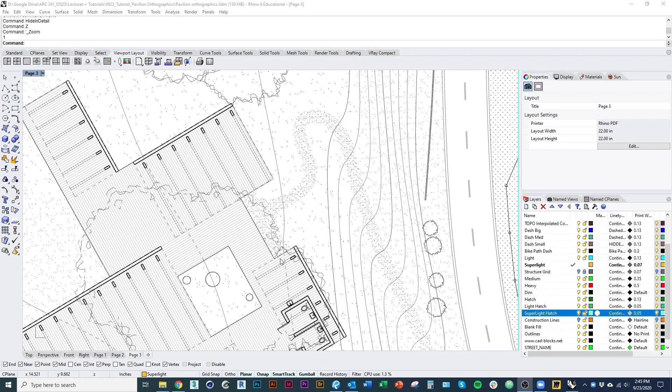Okay, so this is part 4 of the Pavilion orthographic drawing tutorials. As I mentioned last time, I was going to add some detail to this plan. And so here it is at kind of one full scale, which probably only makes sense for my computer screen. But anyway, you get a sense of how line weights are reading and how detail is reading.

Especially when you zoom to 1:1, some things will show up a lot differently at the right scale. But anyway, so this is kind of the level of detail.

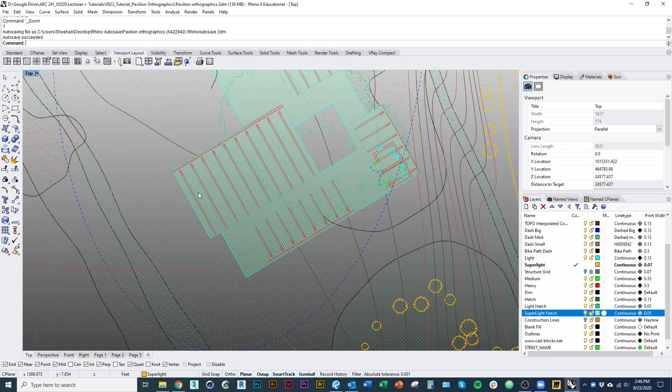One thing I did want to mention, if you are doing a design that has like a roof, floor decking, or a raised floor of some kind, or an elevated floor, another thing you may want to consider doing is including handrails, which again is something that could be designed, can be simple.

So I might use, for example, if I'm thinking I need a handrail right here, I'm going for my superlight line, getting pretty good quality at this scale, kind of just using a double line.

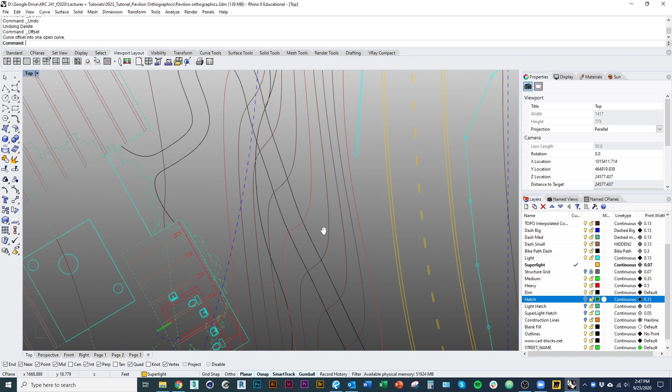And it seems true, you'll notice that's how I adjusted the road to show the dashes, to show the kind of white painted stripe around the edges, off my outlines as well. So that's one way to go with it.

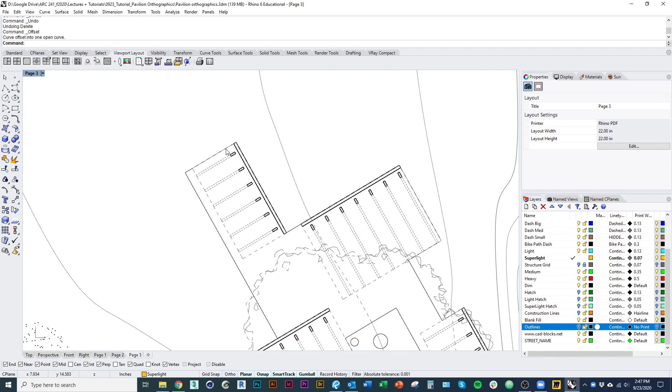Of course, you can also draw the posts if you want, if that's part of what we would see if you were drawing. And then we'll get a sense of whether or not there's a barrier or boundary there, right? Anyway, so the double line I think is a good way to go if you want to show things like handrails.

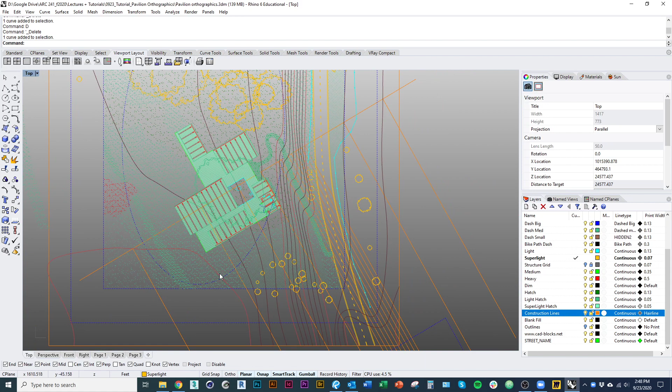Okay, so what I'm going to do in this tutorial is continue with where we were, and I'm going to draw my sections now. Going back to my workspace, I'm going to delete this because I don't want it. So remember we talked about last time having a line that is our section cut line, pulling off our topographic lines from there.

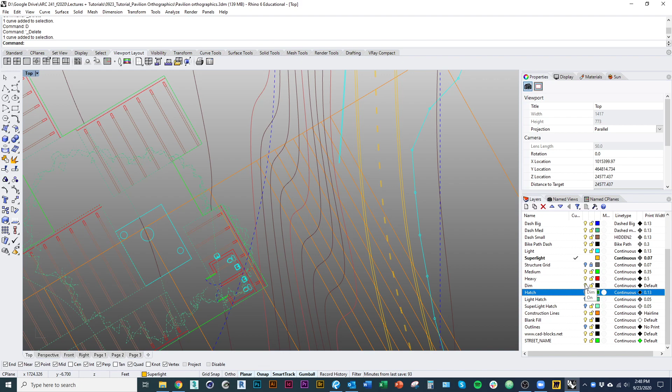Now, I should mention I actually adjusted my topography for where my path goes. I'll turn off my hatches again there, and I'm going to turn on my lines. Yeah, still, all right, so that's how we kind of interpolated our topography.

I'm going to go ahead and just get rid of these construction lines from drawing the topography, since we already have that layer kind of set.

The other thing I'm going to do is go back to my working C-plane, use the command set view, set it to the C-plane, and set it to top. That orients my C-plane, which allows me to draw the right orientation relative to my section.

So once I have my viewport all set up, I'm going to go ahead and start drawing construction lines to indicate my pavilion.

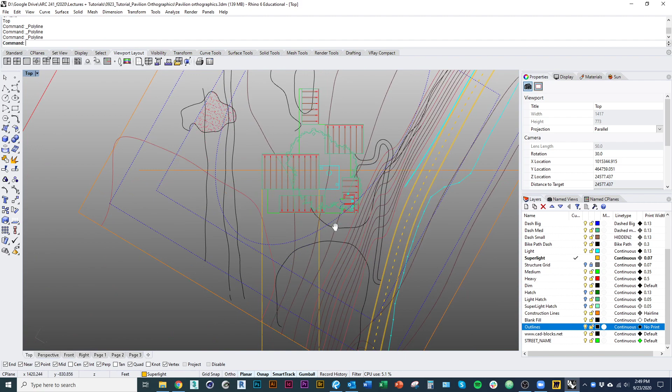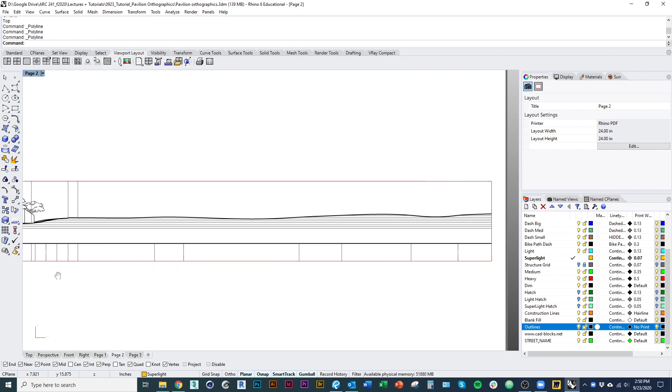So I have to reference back real quick where I put my pavilion. So I kind of put the floor near the, oh, also by the way, this might be useful to show railings in this one. Not sure, you'd have to see if it looked good at that scale, but it'd be a useful thing to do. Anyway, so I kind of put my pavilion at the highest point.

So I'm going to follow that. Let's say it's that contour right there. That contour right there is that point in the landscape right there. But that's the kind of level of the floor of my decking.

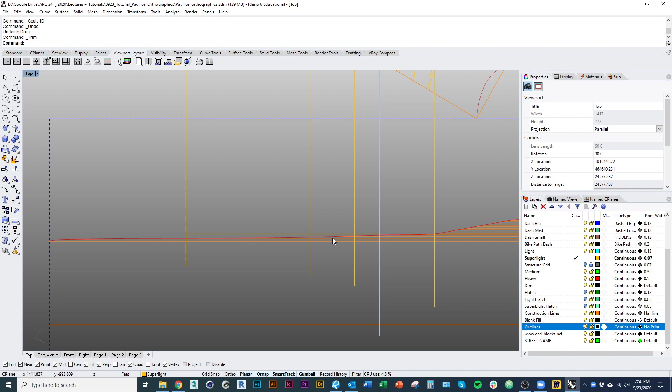And I'm also drawing where this cutout is, where the trees come through. Obviously that's an important thing to show. So that's our floor, basically, that's where we would see our kind of decking.

Again, I'm going to make a new layout. New layout, 22 by 22.

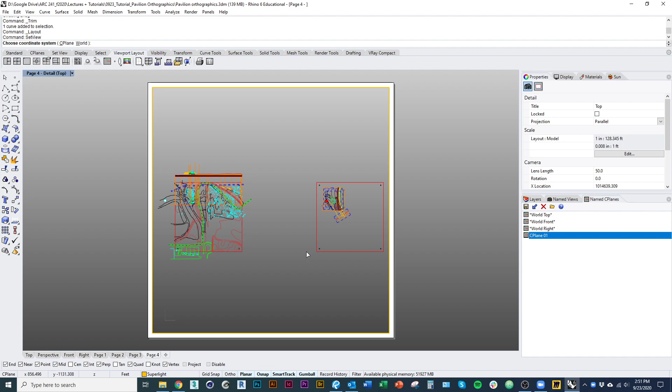And again, I'm going to go into this layout, make sure I have my construction plane set as current. Use the command set view, go to C-plane, go to top. So that allows me to orient myself to my section.

I'm also going to set my scale. Again, we actually want these boundaries to go all the way to the edge. There we go. Of course, with our section, we want to drop it vertically a little bit. But anyway, that'll give me an idea of what my drawing is looking like at the right scale.

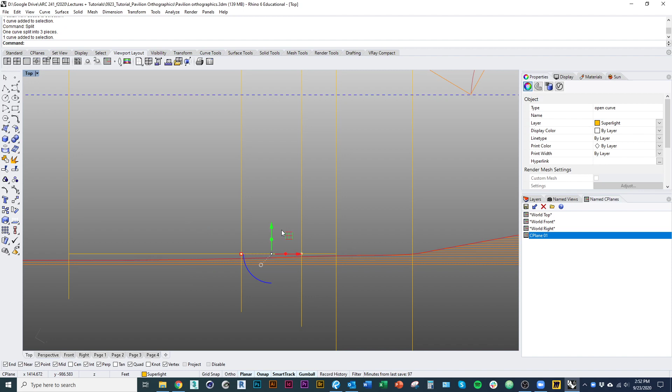Okay, so obviously this is my flooring, I'm going to split, or my floor level, I should say, split it here and here. So there we would be looking at it beyond. There's a couple things we could do. We could indicate, first we want to indicate the thickness of the floor. I'll offset it to a few inches.

Let's make sure we do it, using the option to cap flat so it makes an outline. That's going to go on my heavier line weight.

There we go. We could also indicate here - I don't know if this is something you're being asked to include necessarily in the structural diagram - but you could also include some framing or beams under the decking to show where that goes. I'm going to throw this on a lighter line weight so it should recede more. There we go, so we're making some hierarchy already between the floor we're cutting through and the floor we're not.

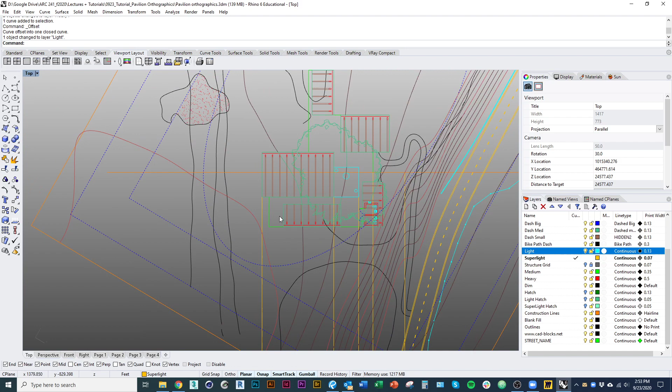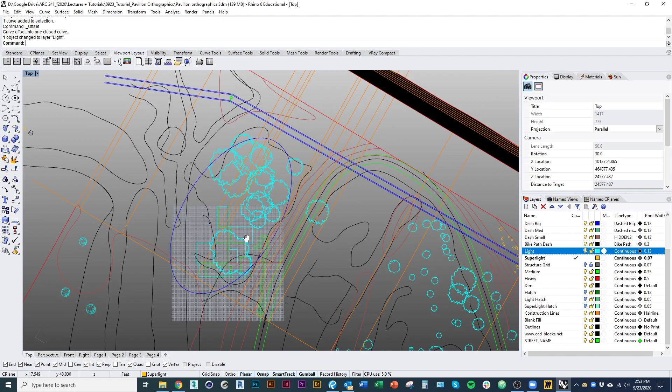Before I draw any structure under the floor, I'm also going to draw this structure which will give me a sense of where my beams are, where my structural grid is happening, and that could line up with the structure below. So in order to do that, I'm going to go back over here where I made my little cheat sheet.

Okay, so my verticals are 8 feet, and then my roof planes go up at 30 degrees. So let's see here, let me just draw that kind of horizontally. Draw 8 feet.

And what depth is this roof? Actually, what depth is it between the section cut line and the back of the wall? I'm looking down here where I see the dimensions of my cursor, so I'm at 10.95 - we'll call that 11.

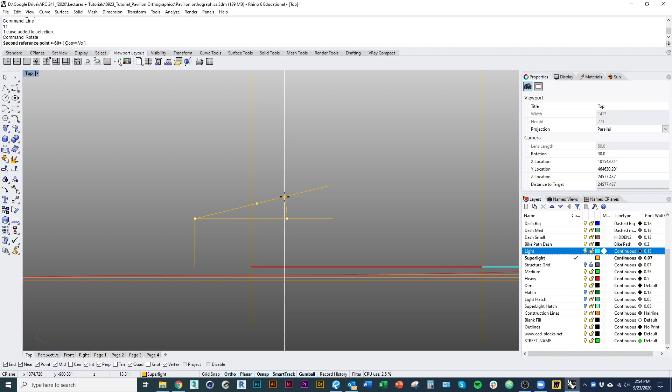And we'll take that to 30 degrees, so that should be a good indication of where my wall goes up, the wall back there, and that's the top of the roof, and that's actually where I'm cutting through, right?

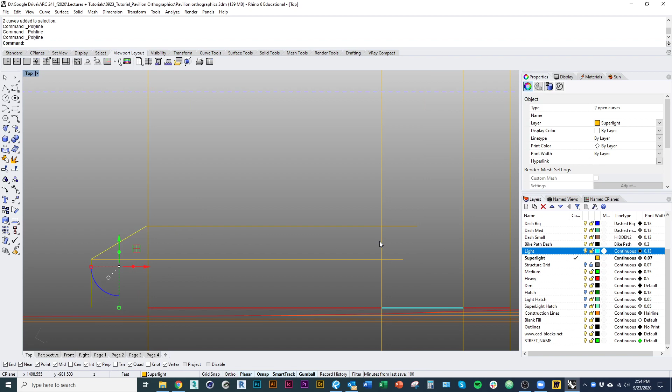So that's where I would want to indicate the thickness of my roof. That's also where I would want to indicate some of my structural beams and stuff like that. Am I on the right layer? Construction lines is what I should be on. Great.

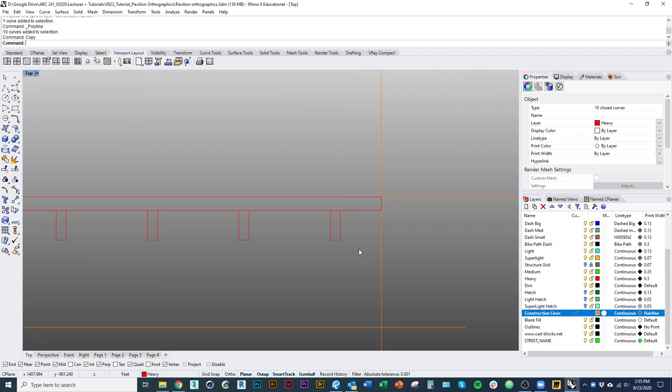Let's borrow this dimension, 0.07. And again, that's where we would be cutting through that kind of structure that we're seeing, and so that's a line that comes all the way down to the ground.

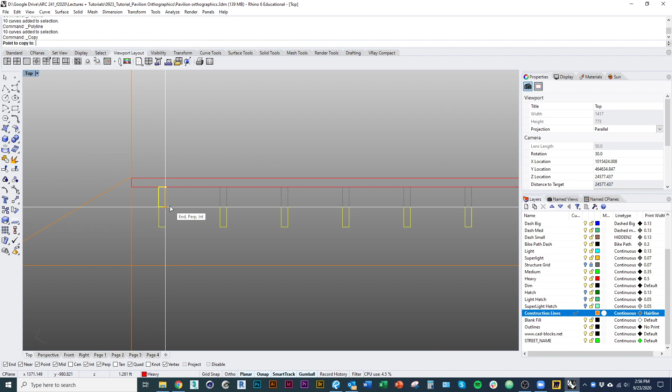We copy these and lengthen them, so we would see that extend kind of to the fold in the back of the roof. We'd also see that extend down to the ground, right?

That's going to go on my lighter line weight. Do that, go on my medium - or even on my light, we'll see. And on my medium I'm also going to do the silhouette of the building. So let's put this on my lighter line weight.

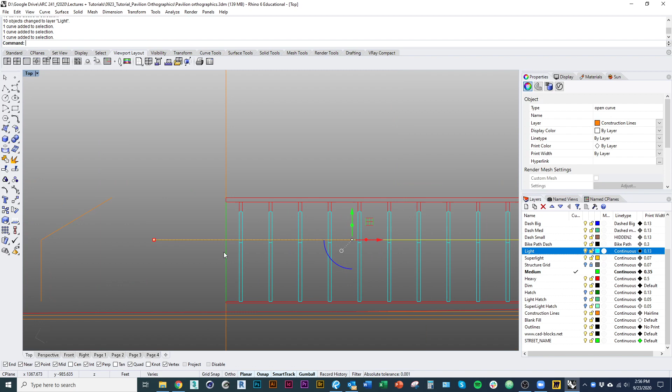Let's split it and get rid of those lines. Wherever you want to draw those, that should be a lighter line weight as well, because it's just a crease that we're seeing in that roof plane. I'll put that on that layer.

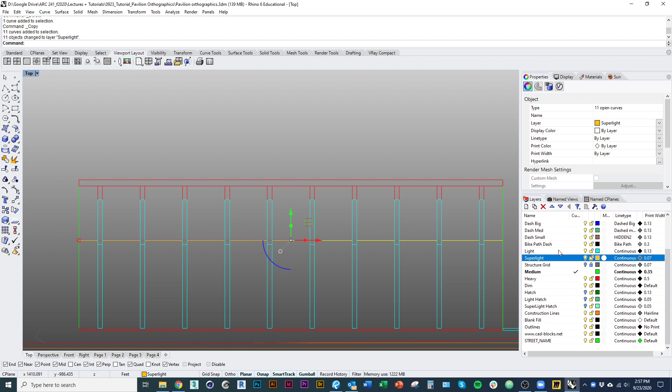Okay, cool. So there again, we could then start to indicate maybe where we would see structure happening up below the floor. So here we would also want to indicate how our pavilion meets the ground, right? That's where our path kind of meets with the pavilion, so that we could start to adjust our topography a little bit.

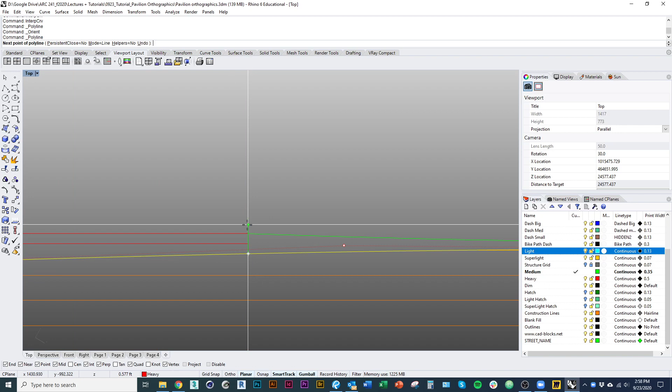Maybe there's a little edge or a retaining wall or something that holds that. Okay.

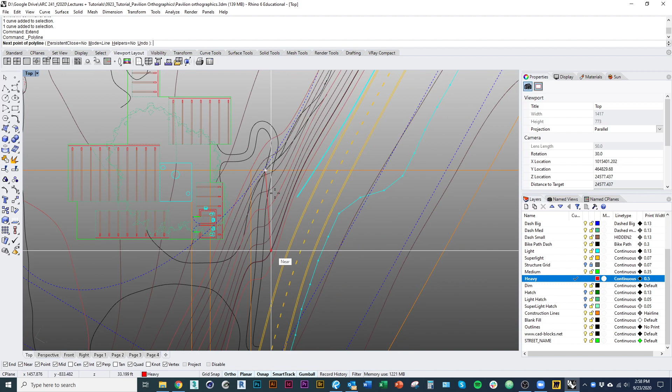This section would also actually indicate where my path is, and I want to go ahead and show that too - construction lines in here, that line. So where we see that, and again, we wouldn't necessarily have a super structured path, we're just going to level it out, right? Because anywhere where we cut through a path, we'd see kind of a level area. Actually looks pretty good right there.

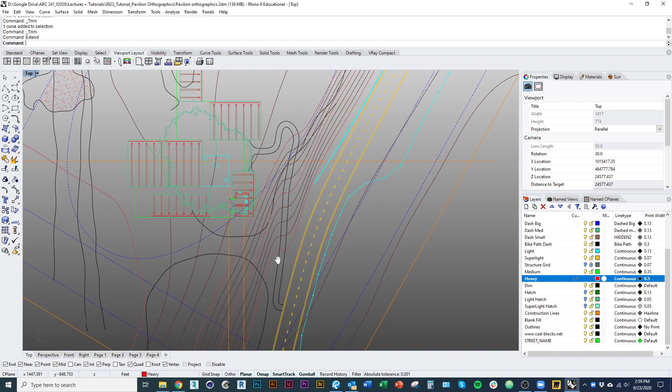Okay, our topo - great, there's a path up above, and we'd see a little bit of path there, already kind of indicated. That could have a little bit of an edge too.

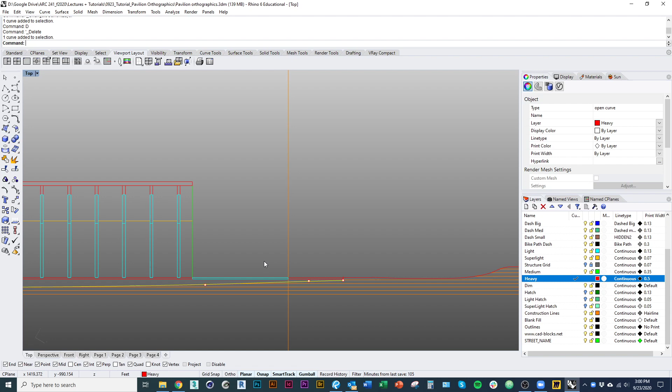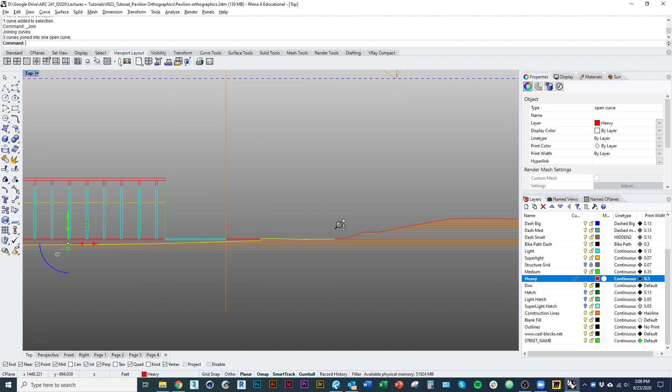Okay, now the other thing we wanted to talk about here is the difference in what we see in the ground plane, between just the surface of the ground and its shape basically. So let's see here, do we have a line that goes... okay, and so what I would want to indicate in between these areas where my paths are is some difference in the nature of the ground. So if we refer to our example project that we're basing this on, we're seeing that there's some variation in that ground surface that we're reading.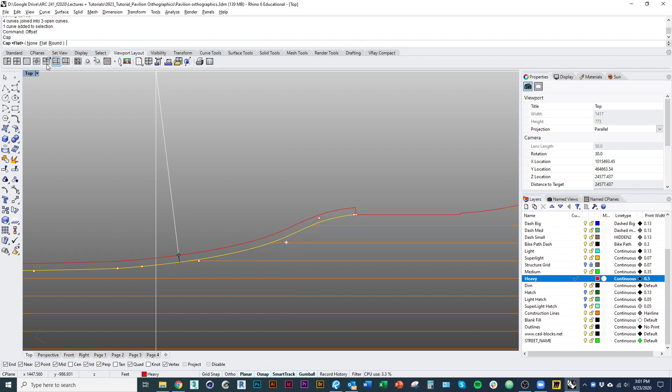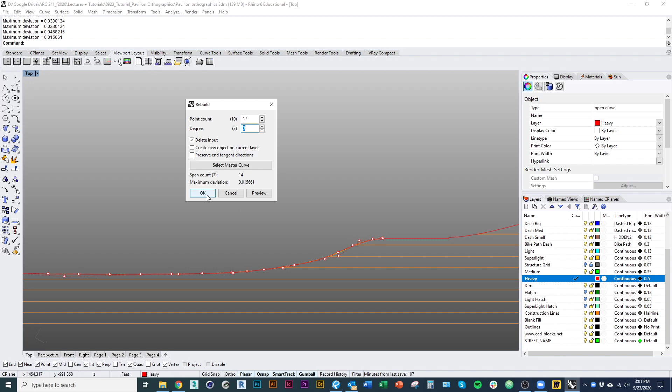So I could offset this line - I'm going to turn off the cap and add a little bit of variation. Or, I'm sorry, what I should actually do is just rebuild this curve. I can rebuild it with however many points I want. I want to set the degree to 3, keep it at 3. Okay, and then we can just mess around with our points a little bit for variation.

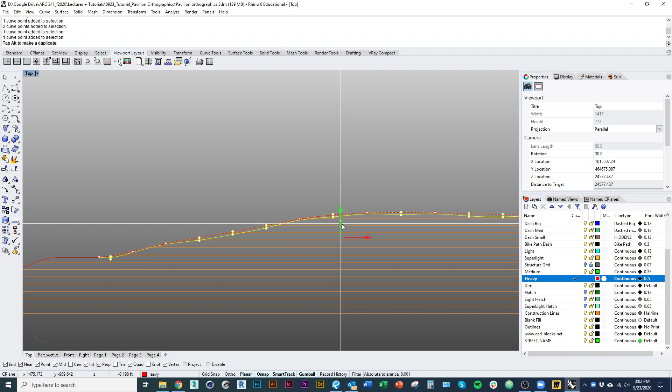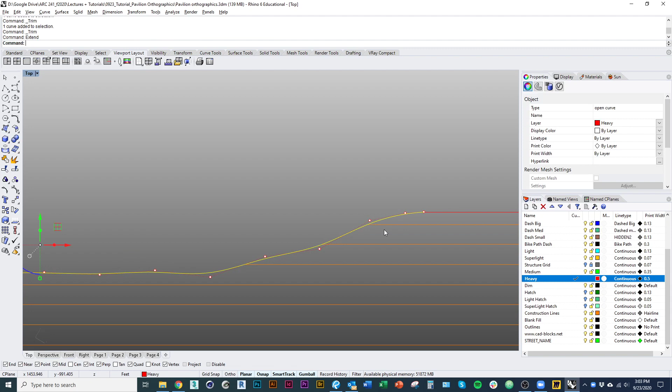Okay, I'm going to clean up my section cut lines there. Right, cool. There, we'd see, yeah, so down here we might also see some variation.

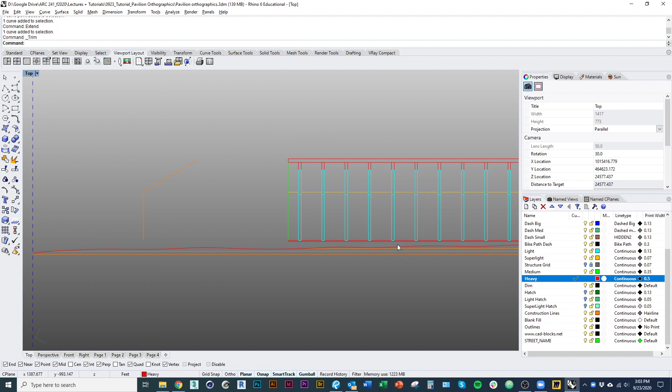Okay, so the other thing we would want to show in this one, again, we could show that railing if we need to. I think in this case, the height of that deck off the ground wouldn't require a railing. But...

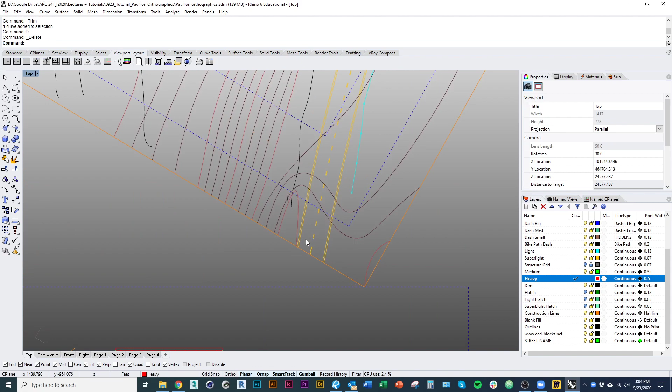The other thing we'd want to indicate, so let me draw, first of all, the structure behind here. Remember, we see that as well. Construction lines. And it has a depth of 20 feet.

Copy these down right now. So just Scale1D that to 20 feet. That's how high that guy's going to go. All right.

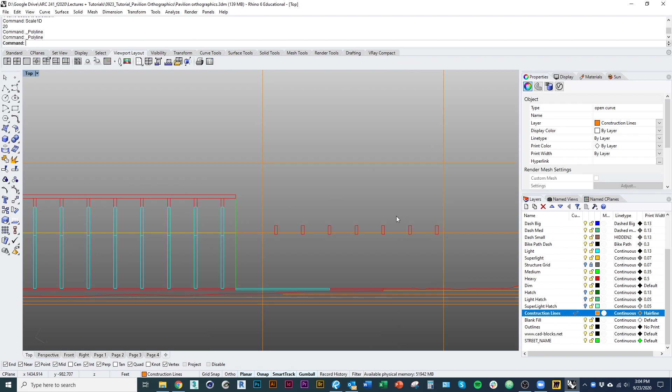I'm just going to copy this using the orient command. Again, because we're not actually cutting through the roof, we're just looking at the edge of that roof.

I'm going to throw this onto a lighter line weight. I guess we would also actually be looking at the floor beyond here. I want to make sure we indicate that.

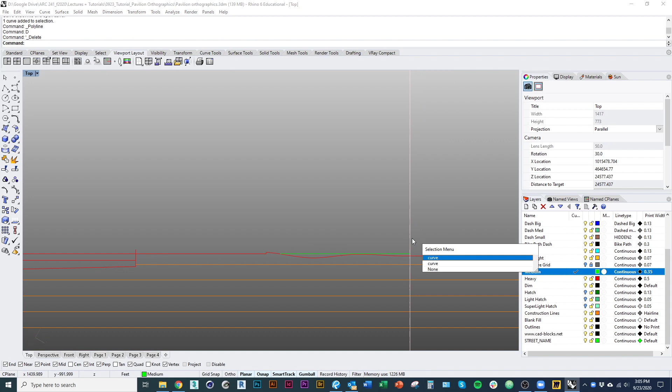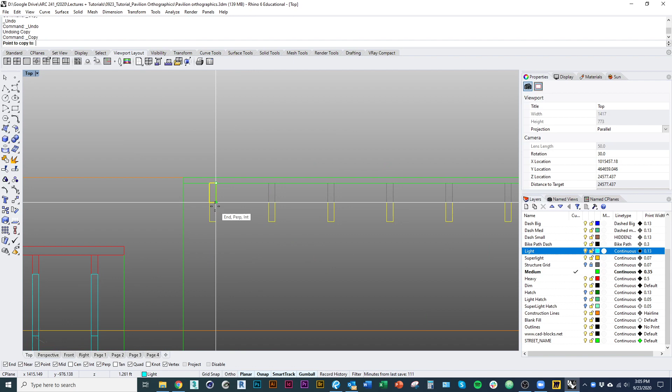Fine, delete that. Okay. Remember this lighter as well. I'll make those guys even lighter. Okay.

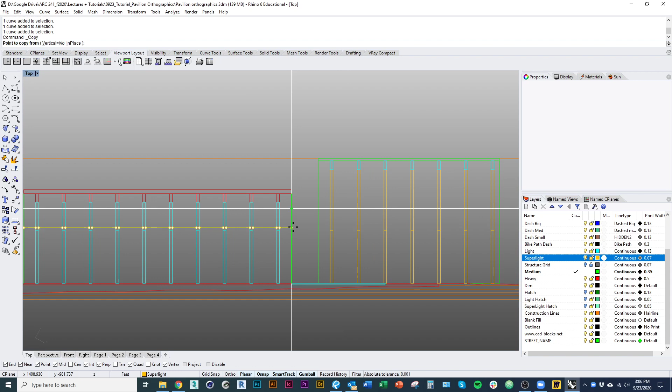Just copy these in. Oh, here, it should be. Oh, I guess this end's a little bit cut. That's okay. All right, so we would see that. We'd also see the pavilion behind this one. And then we'd see the tree.

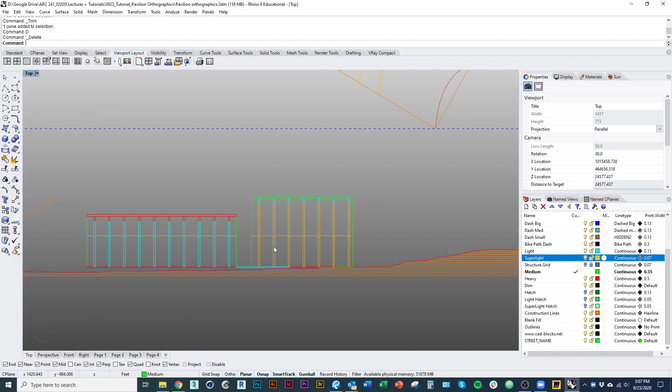So I'm going to add those things as well to this drawing. I'm also going to add that handrail, remember, from the bicycle path that we would see.

About 36 inches, 3 feet. It may actually be taller, in fact. That's that handrail. Again, best to show those kinds of things with a little bit of thickness at this scale. I'm going to do about 2 inches.

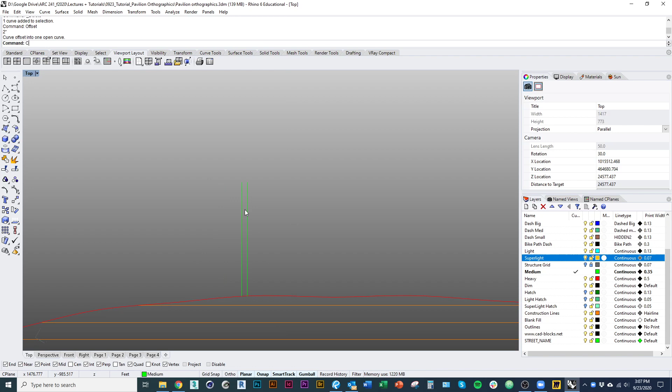Circle 2-point, remember, because we're cutting through that thing. That's going to be our heavier line. I'll change this onto our lighter.

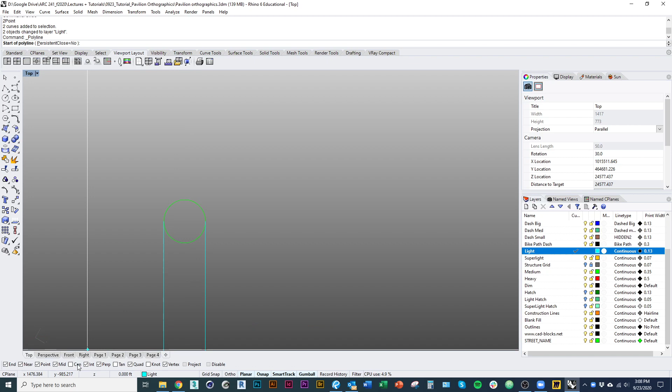Then we'd also see that kind of extending away. I'm going to draw from the center point and then offset those lines. We'd also see the handrail extending away.

And actually, if we wanted to map that out somewhat precisely, we could go divide on this curve. Just say we want to do, I don't know, 12. And I could make a construction line for each one of those points, imagining that's an upright on my railing. I actually got it pretty wrong.

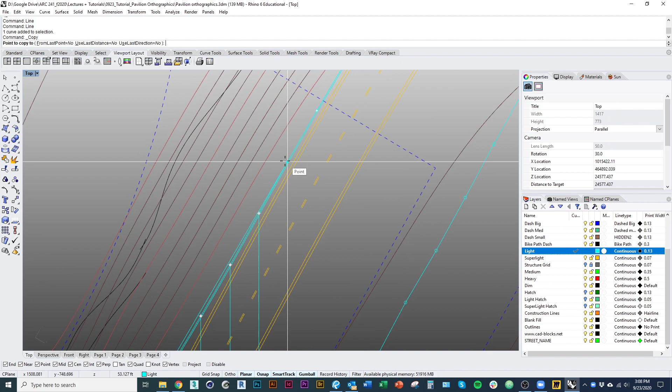Okay, those are my uprights. I'm going to redraw this. Imagine there's a little bit of variation in this. Not to snap to my ortho here. Here we go.

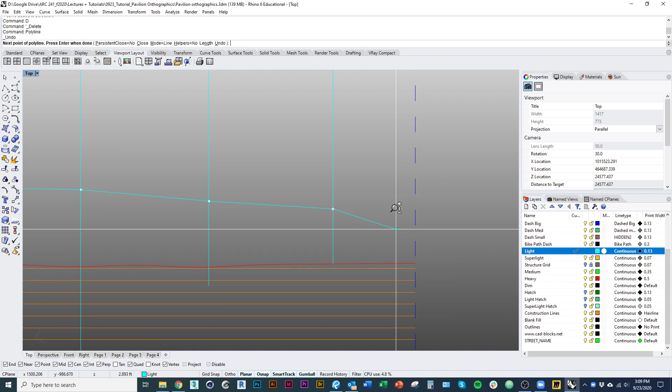Okay, and then I'll do the same thing. Offset this guy. I'm going to measure the radius of my circle. Use the option both sides. And I'll just copy that from this circle to this one, and copy these.

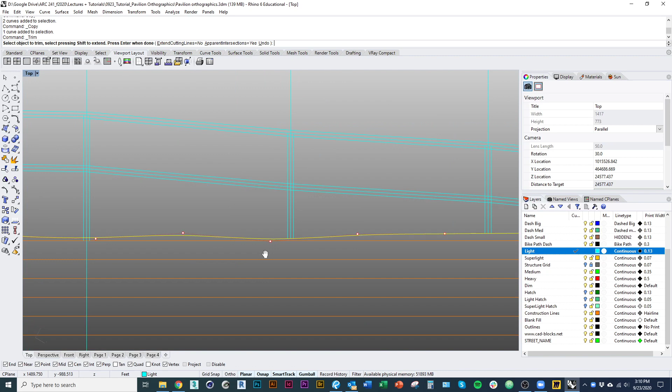This is kind of the same thing you would do on your own pavilion if you had railings or something like that. Okay, delete those center lines.

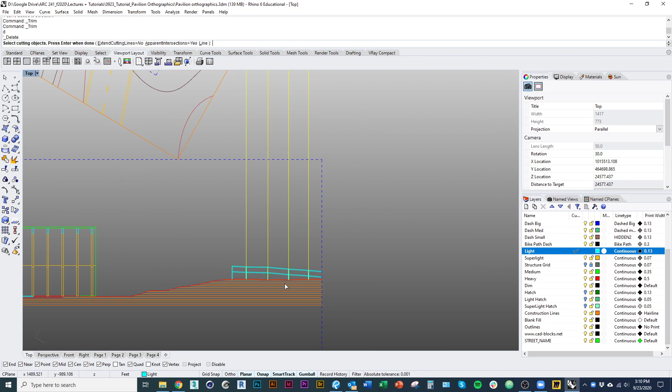And if I really wanted to go crazy, I could show how it kind of intersects, right? Right, each joint would look something like that. This would actually be pulled back slightly.

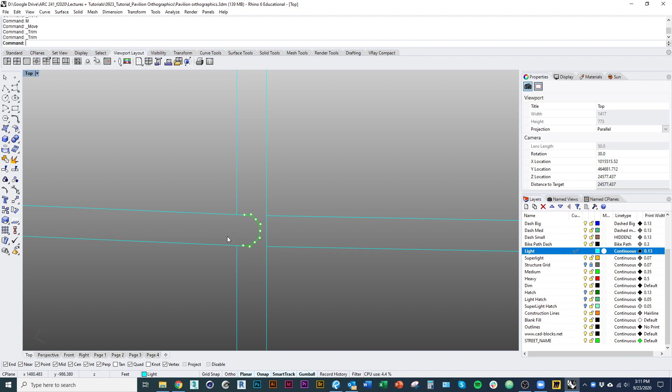Anyway, I won't make you watch me do all that. But so that's how you would kind of draw that stuff. And I'm going to actually put this in later.

Cool. All right, so I have my railing there. I should also actually indicate my bike path in the section cut, as kind of a flat area. You could even put a scale figure with a bike there.

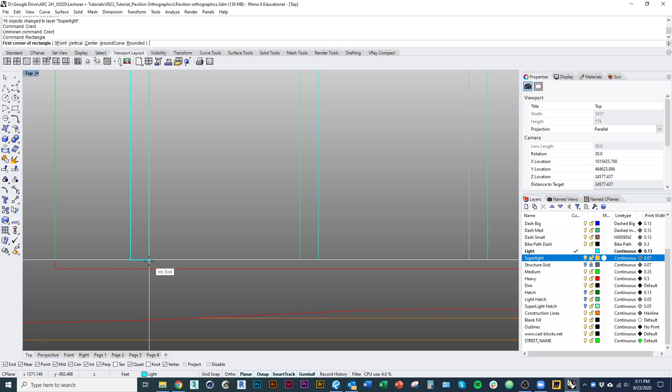The other thing I would definitely want to show in this section is going to be that tree, obviously, like I said, and what I'm going to do right now, is show a little bit of structure underneath. Remember that in this spot anyway, is we're actually cutting through there.

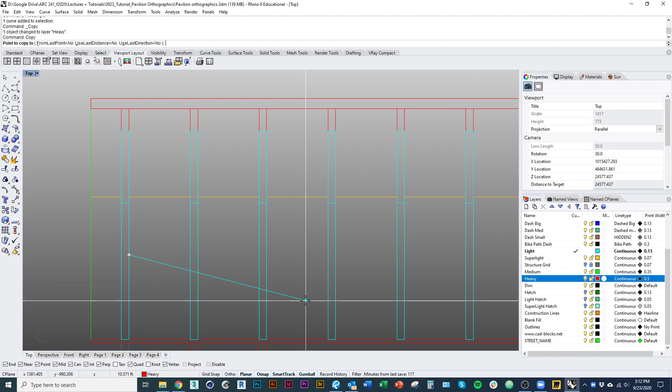Show something like that going on. You wouldn't see it there, right? Because that's actually behind. But we would see it right there.

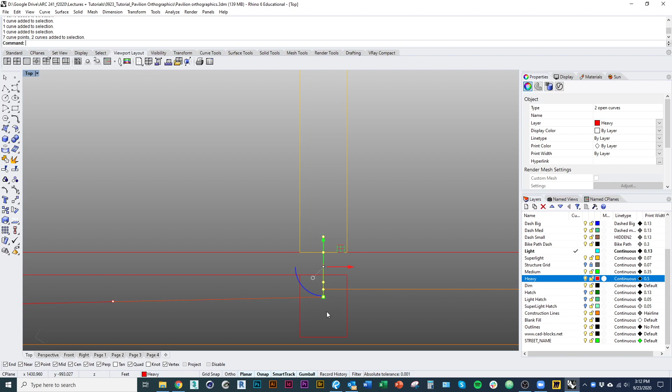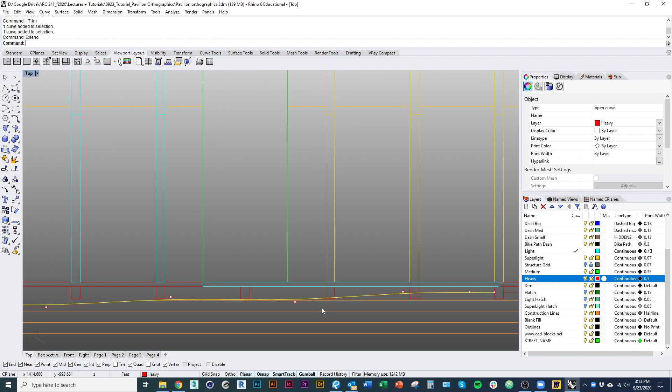And I'll do the same thing for these guys. If it's a place where I'm cutting through those kind of floor elements, yes, I want to see that. Place behind, I want to lower that line weight, and don't want to see that.

So these would go the lower line weight, like so. And we could also indicate maybe a couple areas where that structure actually comes down to the ground.

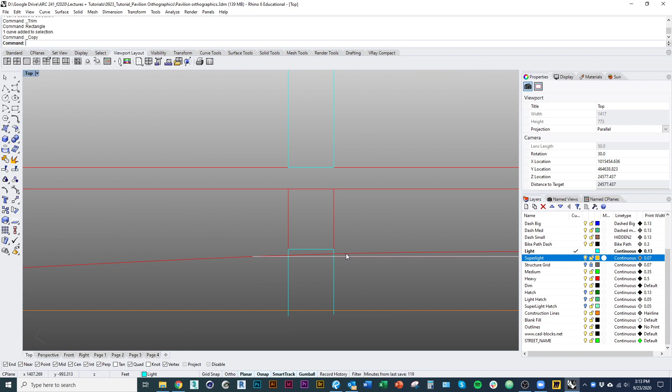This will all be stuff you should have developed through physical modeling. So what you really want to do is represent whatever's going on with your physical model. I'm just making this stuff up so you can see what it'll look like.

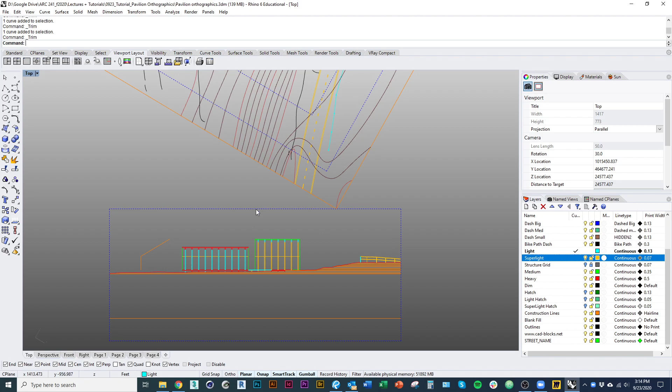Okay, I'm going to go ahead and wrap up this drawing. Obviously we need to show two sections, one looking in each direction. We need to make sure we indicate where we're cutting through, and we need to label our drawing.

So the other thing I'll talk about real quick is labeling. Of course we have a couple different options. We can label our drawings on the sheet. You're welcome to do that if you'd like.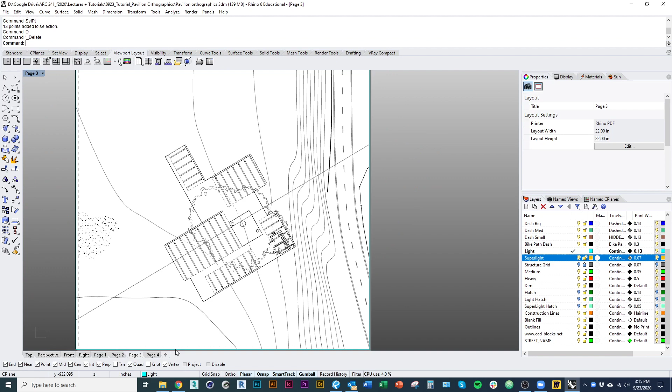Like we did in our shop drawing assignment, we can just use the command text and write plan, 1/8 of an inch equals 1 foot.

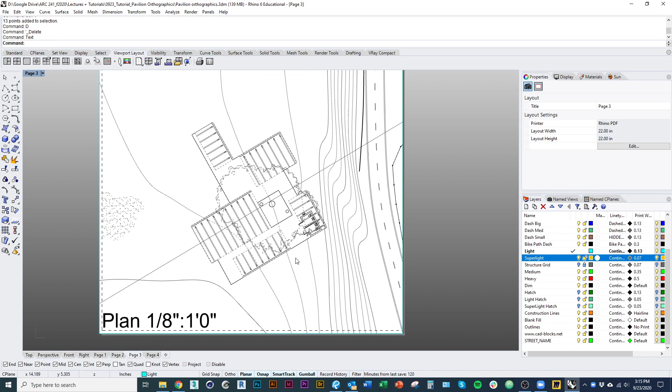We definitely want to indicate that. We also definitely want to indicate north, right? So if we wanted to, we could orient this whole plan and shift it a little bit.

What I mean is we could go set view, C-plane top. By the way, you can use the home button, or go back into your views. But if I go to named C-plane, I'll set my C-plane first, then set my view to my C-plane. Awesome.

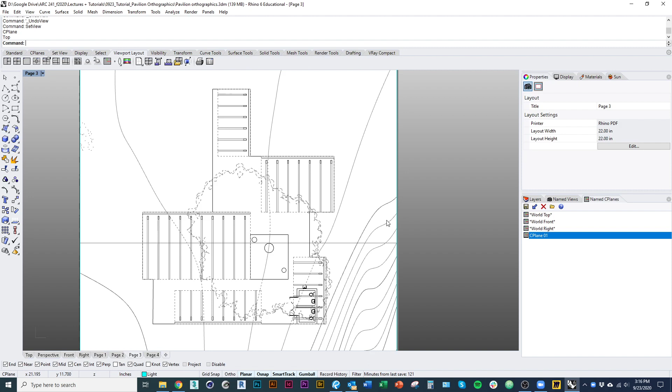And go back to the main plan - make sure I reset my scale every time I zoom in or out in that detail window, since it's going to change my scale.

Anyway, what we'd want to do is draw a north arrow. If we choose to show our plan like this, we want to draw our north arrow - I'm using this line because I know it's correct - obviously way too big, oriented to the right direction. Our plan is oriented more to our design, to our pavilion.

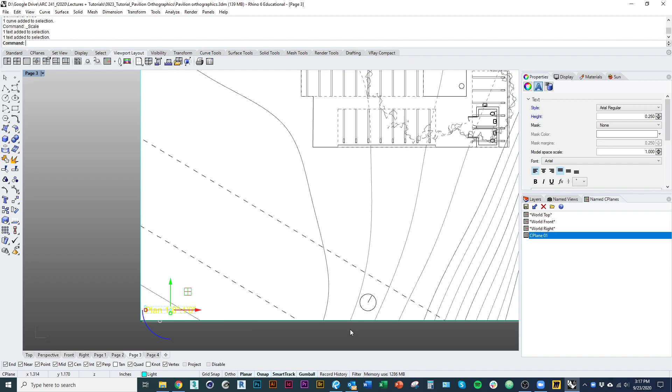This should be small and unobtrusive. And of course, if you're doing this for your InDesign file, you probably want to just label it separately there. I'll let you handle that.

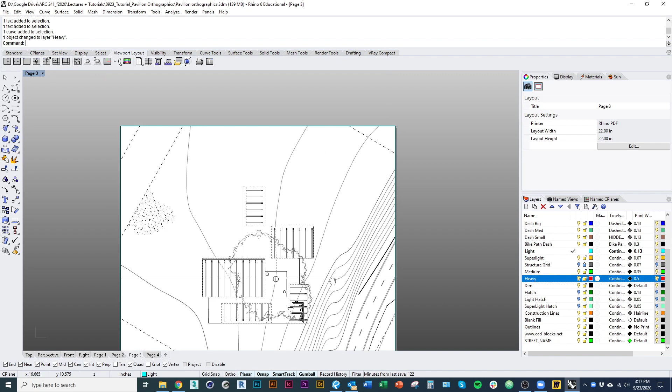And then finally we'd also indicate - by the way, here's something that might come in handy. These detail views, whenever you select a detail window, like when I go inside this window and I'm on the plan, you'll see that a new set of options shows up in my layers panel. What that indicates is I can set individual properties to my layers just for this detail view.

So if I want to adjust anything very slightly for this particular drawing, I can do that in my layers panel, which is really useful for making final adjustments. But what I was going to do is go in here and just turn off my construction lines - turn off their visibility just in the viewport.

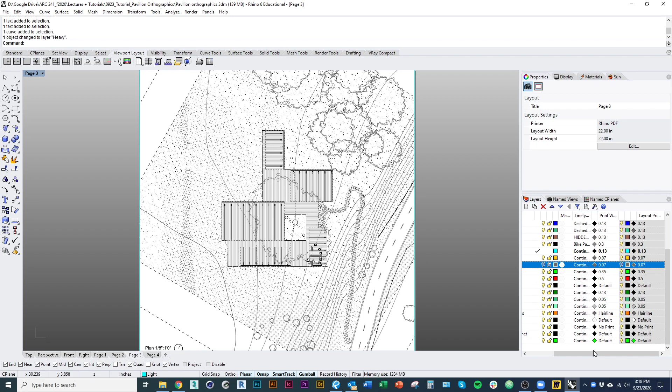And that enables me to show that - to have it on in my workspace, but off in my drawing.

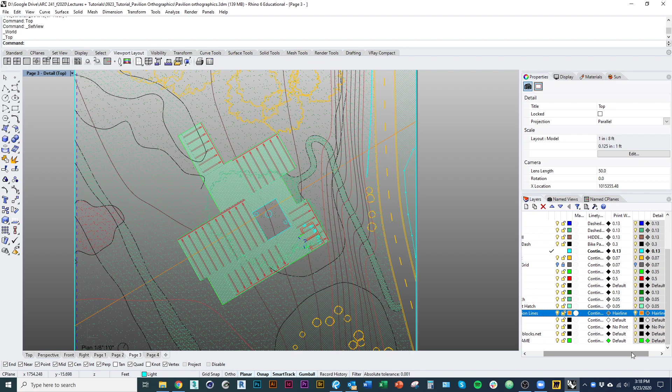The last thing I wanted to show is how to indicate where I cut my section - that's important as well. Of course, I just turned the layer on for it. There we go. So there's my section cut line, that construction line.

I think one of the easier, less obtrusive ways to draw a section cut indication is to draw a couple little L's. Now I could also, if I'm being really careful, indicate where the start and end of my section are relative to that drawing.

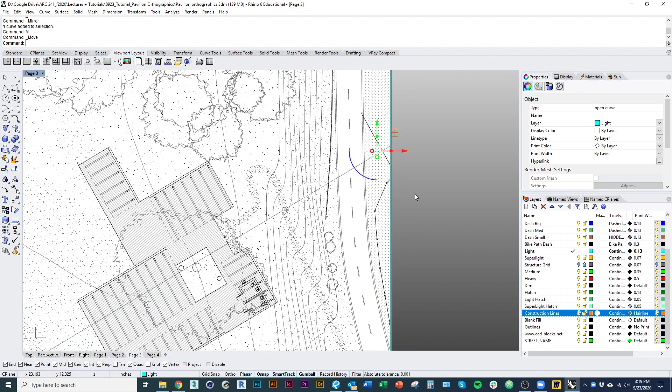And I'd want my construction lines off - don't need those lines. I might even bump that up to a heavier line weight.

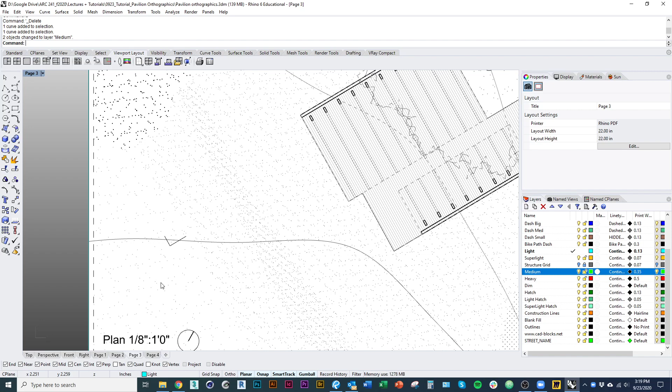Then I'd want to add some text in here and indicate that that section cut line corresponds to a particular drawing. So I can call it whichever section - I don't want to indicate my scale on that label, but I do want this to be a lighter line.

So, that's confusing - I can call this section A if I want to. I can also just write A next to each of my tags. I'm going to scale this down quite a bit. Again, I want to orient it to that tag.

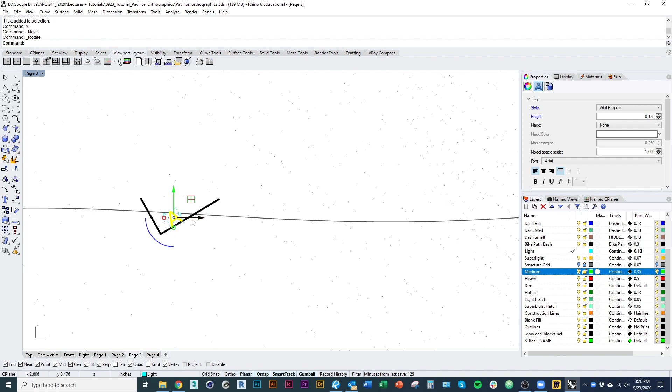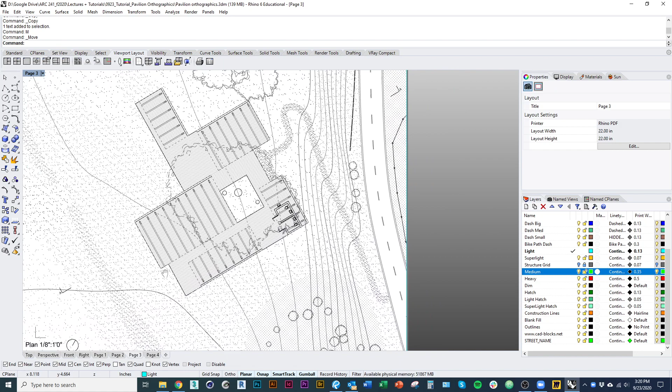There we go, so that's a good way to indicate my section. And then when I go to actually draw my section, I would just copy this - say that's section, like so.